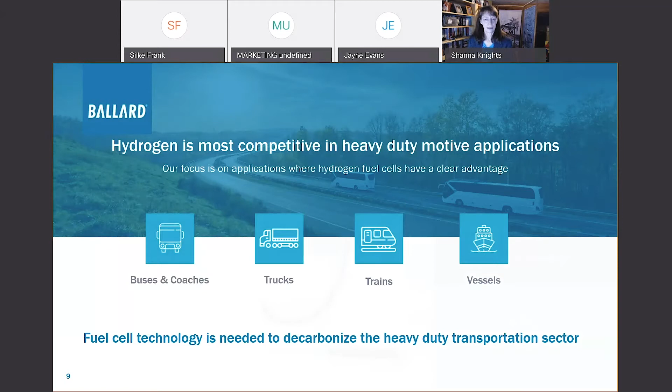So fuel cells work with batteries. We're not competing with batteries, but we work together. But there are areas where batteries alone are not sufficient. And so that's where combining a fuel cell with a battery in an electric vehicle is really the best solution. And only fuel cell based vehicles can directly replace diesel route for route. So they provide the same type of performance regardless of the weather. So you don't have a derate, say for example, due to cold conditions, provide the same type of range and payload. And the refueling time is similar to a diesel as well.

They're very adaptable. As I mentioned, they're hybridized with fuel cells and batteries, and you can design your system for many different drive cycles. They're very scalable. You can have many different sizes, and they can be optimized for the vehicle you need. The high energy density, I think we've heard about that already today as well, enables longer routes and heavier payloads and hotel loads than a battery electric vehicle would do.

The infrastructure is also very scalable. It's the same as we're used to now with liquid fuels. You just have larger tanks and you can fuel more vehicles. You don't have to add more charging stations, for example. Hydrogen is already widely available today, but the expansion of renewable hydrogen is growing, and advancements in the hydrogen conversion will give us more renewable options, which of course are very important for decarbonization.

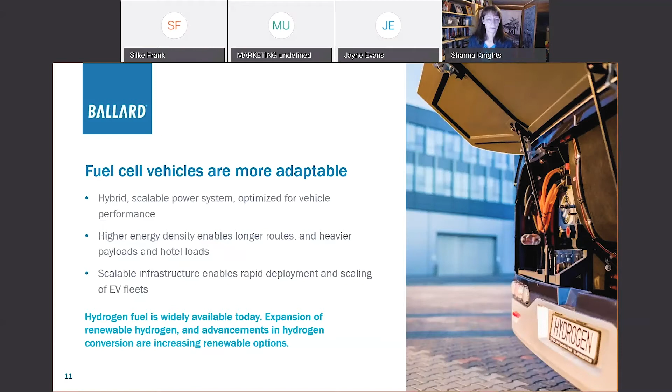And most importantly, the costs are trending down. We've seen significant reductions, and based on a number of studies, we're expecting further significant cost reductions. So if you see the blue curve, we can see that the fuel cell vehicle cost soon will beat that of battery electric vehicles, and will also be cheaper than diesel internal combustion vehicles in the relatively short term. So we expect the fuel cell system cost to drop by 70%, and hydrogen distribution and refueling costs will drop by 40%. And this chart represents the total cost of ownership based on a study from McKinsey. So by 2030, we expect it to be cost competitive in a number of applications.

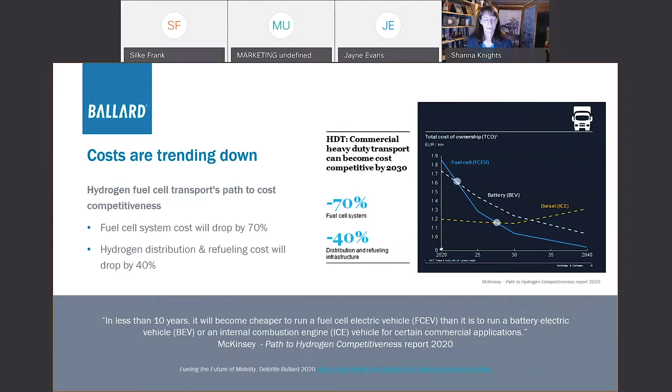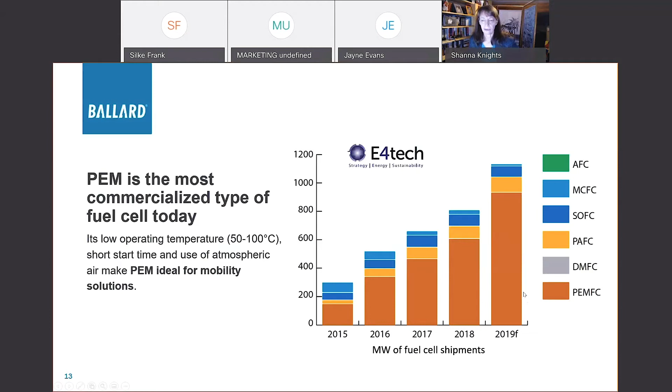This is data from E4Tech, which is a company that publishes annual reports about the status of the fuel cell industry and shows the amount of megawatts of fuel cell shipments every year. And as you can see, the fuel cell technology is significantly increasing every year and is accelerating. And this also is broken out by the type of fuel cell. We saw a nice slide earlier on the different types of fuel cells. And the PEM fuel cell is really dominating. That's the type of fuel cell that Ballard produces exclusively. And that's because the temperature range makes it very suitable for mobility applications, and it uses atmospheric air. So this is the most commercialized type of fuel cell today, and it's expected to continue to grow.

Looking at Ballard, we're a global company. We're headquartered in Vancouver, Canada, but we have operations in the US, in Denmark, and the rest of Europe, and a number in China as well. And we have manufacturing facilities, R&D facilities, and service facilities throughout the world. And we work with a number of different partners to deliver our fuel cell solutions.

So very briefly on Europe, as we're operating in the Europe time zone right now, we have our European headquarters in Denmark, and that's also where the Ballard Marine Center of Excellence and our Critical Communication Infrastructure Center of Excellence are located. And we have a manufacturing capacity of 60 megawatts per year.

We have more than 80 employees in Europe dedicated to sales, market development, engineering, manufacturing, service, support, and training. And they service more than 60 heavy-duty vehicles in operation, are conducting 2 rail projects, developing fuel cells for rail, 6 marine projects, and support 380 backup power systems, which are in service.

So now looking at buses, Ballard has been working in buses for a long time. I've been at Ballard for 25 years myself, and one of the first projects I worked on was some of our earliest buses in revenue service. And currently there are more than 1,000 buses powered by Ballard. And we work with multiple different bus manufacturing companies in Europe, the US, and China.

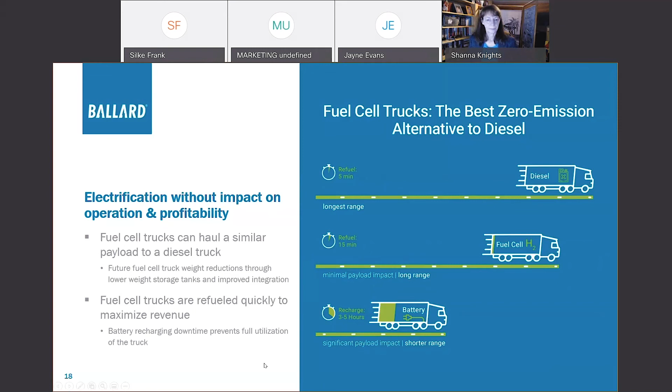So trucks powered by Ballard, we're working with a number of different companies and applications. There are over 2,200 urban delivery trucks in service in China with Ballard fuel cells. We're working with Kenworth on a Class 8 demonstration truck at the Port of Long Beach. There are United Parcel Service Class 7 trucks in California. There's a very large 60-ton truck demonstration project in Alberta here in Canada. That's a double trailer truck. Also, there's refuse trucks in Europe and mining trucks in China and South Africa.

So getting now into the technology a bit more. So we continuously invest in our technology and our product development. And looking at the fuel cell, the fuel cell consists at its core of the proton exchange membrane, we've seen some pictures of this. On either side of that proton exchange membrane are the catalyst layers. And then the gas diffusion layers, which is a carbon paper. This is a very thin sandwich called the membrane electrode assembly, and that's encased with conductive plates and seals,

and that's our unit cell. And that's where the power is produced. And those are stacked together in multiple units to create a fuel cell stack. Those are combined with balance of plant components such as air and fuel handling. And that's the fuel cell module that we then sell to our customers for integration into the vehicles.

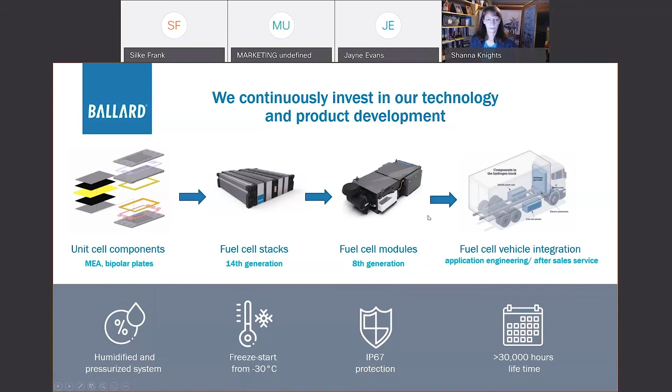So now looking a little bit more at the membrane electrode assembly. That's again the proton exchange membrane, the anode catalyst and the cathode catalyst. These are the electrodes. And the cathode catalyst is where most of the catalyst is, in the cathode layer, and very high cost. So if we look at the fuel cell stack cost breakdown at high volumes, we see the catalyst accounts for up to 41% of the stack cost. So that's very significant. Clearly, if we want to reduce cost of fuel cells, that's an area to focus on.

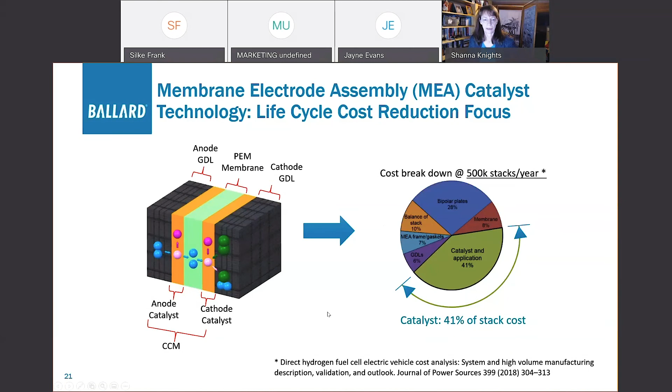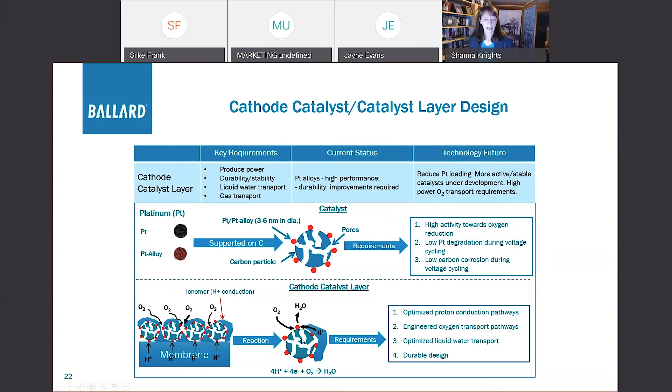Those catalysts have to have very high activity towards oxygen reduction to convert the oxygen to energy. They have to have low degradation rates; we've seen some information on that already due to voltage cycling or carbon corrosion. Those particles are then combined in a layer and put on top of the membrane with some of the same material as in the membrane, the ionomer, and that has to transport protons. So overall, the catalyst layer needs to have good proton conduction pathways, have good pathways for oxygen to access the catalyst, and be able to remove the water that's produced and be durable.

So in terms of the approach to reduce catalyst, we look at many different factors and we design the overall stack and the overall application. We look at the current density it's operating at, how much catalyst you use, how you operate it, because that can significantly impact your degradation and your performance, how much performance you have at the beginning of life, how well you utilize the catalyst you have to have the highest utilization you can, and how robust it is.

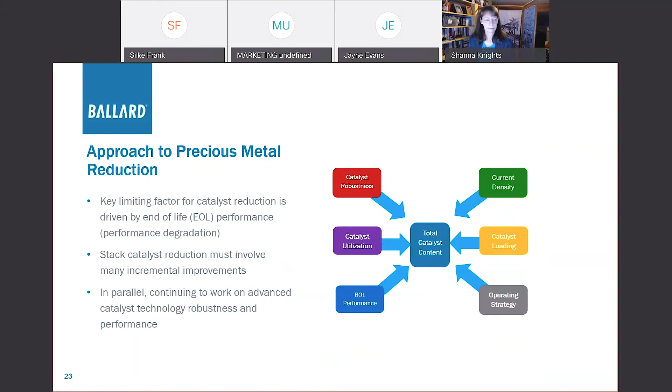So what happens if you have a more active catalyst? Then you can have better performance in your fuel cell. We characterize fuel cell performance by the amount of voltage you get per given current. And by having a more active catalyst, you can raise that voltage, which translates to an increase in performance or increase in power produced. So if you have more power produced, you can have fewer cells, or you can reduce the amount of catalyst you have per cell. Either way, you have a cost reduction.

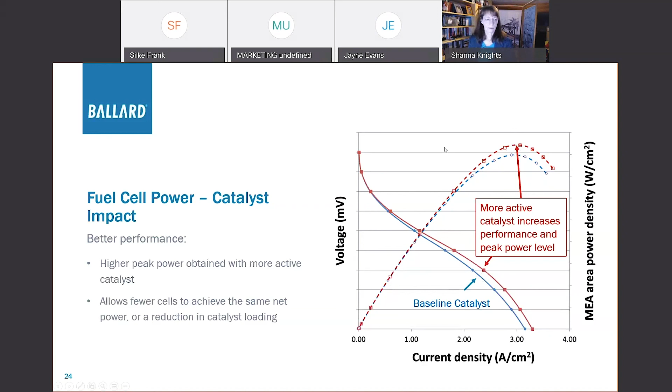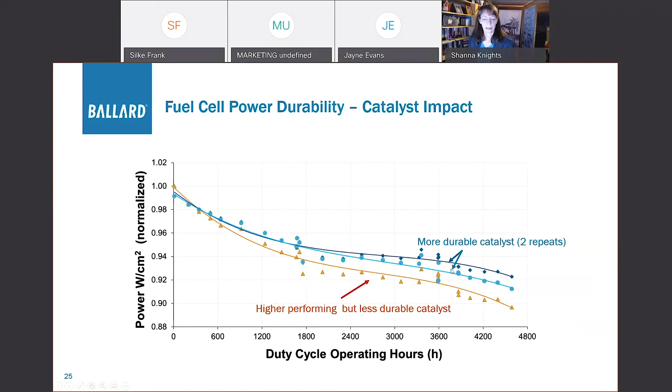So our next steps overall for the industry and technology are to continue to support demonstration and pilot deployments, foster collaborations across the hydrogen ecosystem. We're always interested in collaborating. Continue to invest in development of fuel cell technology and products, drive cost reduction to meet market targets, develop industrial partnerships, and reduce the carbon footprint of our products and our operations.